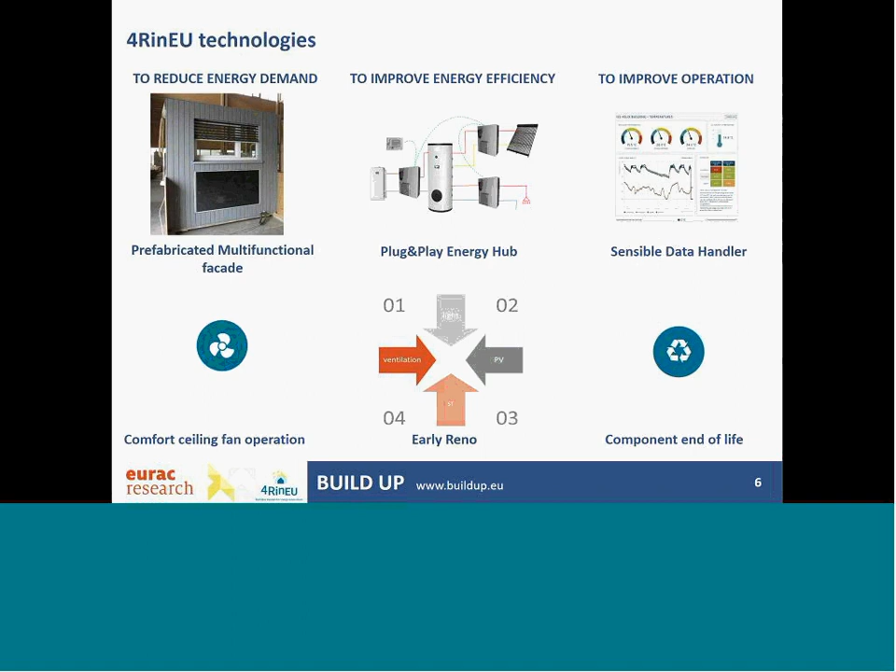In this case, we are developing a tool to optimize the use of renewable sources, in particular PV plus battery, but also solar collectors, natural ventilation, and daylighting. So the tool to optimize the use of the envelope includes different kinds of strategies and technologies to exploit the local renewable sources. And then a specific study on the end of the renovation cycle for the technologies in order to increase the reuse and the recycling of the materials we are using.

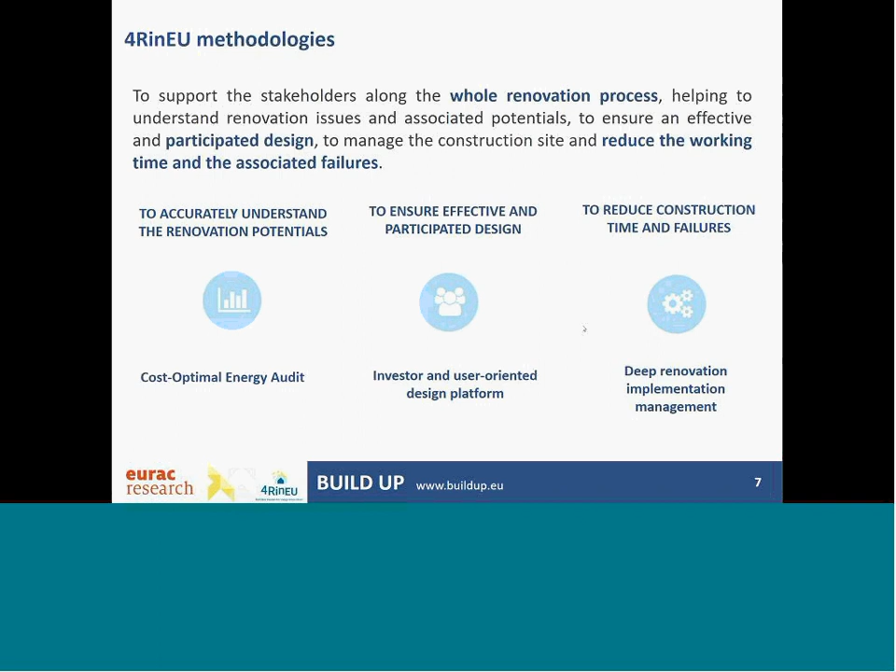And then about the methodologies, starting from the audit at the beginning of the process, just to decide and to drive the design process. Here the idea is to try to optimize the investment in effort and cost and the information we can get from the audit. To facilitate the design process and to involve the different players in a participative design approach, and also the best managing of the construction site as the third methodology. And as I said before, all these feed into a cost-effective rating system that is a way to manage all the information and to actually implement the deep renovation.

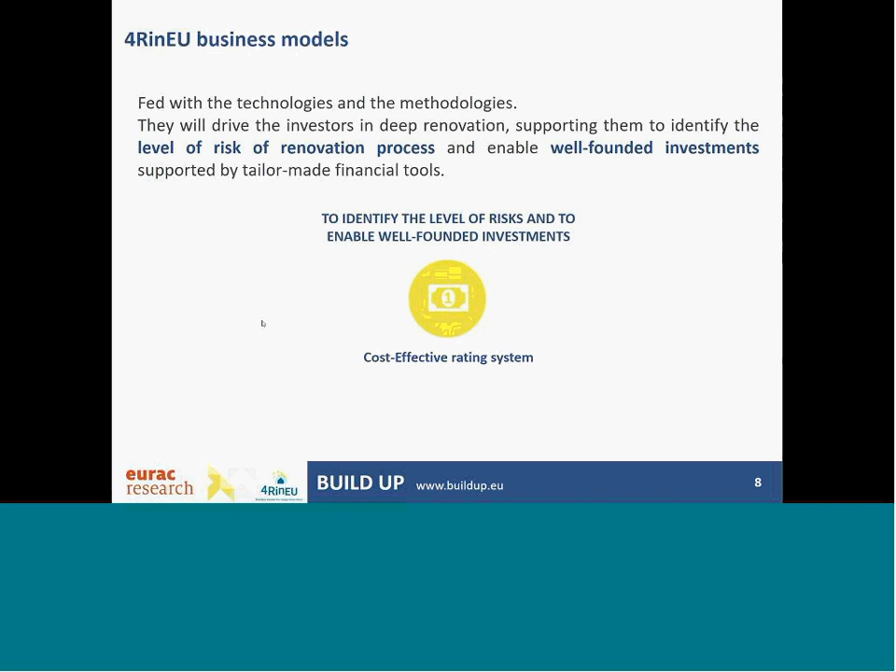So concerning the technology development, the lesson learned from the first application is the need of close collaboration among players, so owners, advisors, contractors, researchers, to improve technology solutions and have actually a systemic package of deep renovation. The participative approach is very, very important. That again is something we foresaw in the proposal, and it was demonstrated that it is very important.

It's important to quantify the evaluation of the performances with a functional mock-up to be tested in the laboratory, as well as with a numerical model and parametric simulations. And then the improvement and implementation phase is to be driven by performances. So it is important that the different players always look at the performances of the solution.

So for the case we already implemented, there was an initial concept of the deep renovation, some prototypical action just to perform a pre-analysis of the renovation packages and of the specific renovation package of the specific building renovated, and then the detailed technical specification for starting the procurement procedure. So a very detailed bill of materials to be used in the tender procedure.

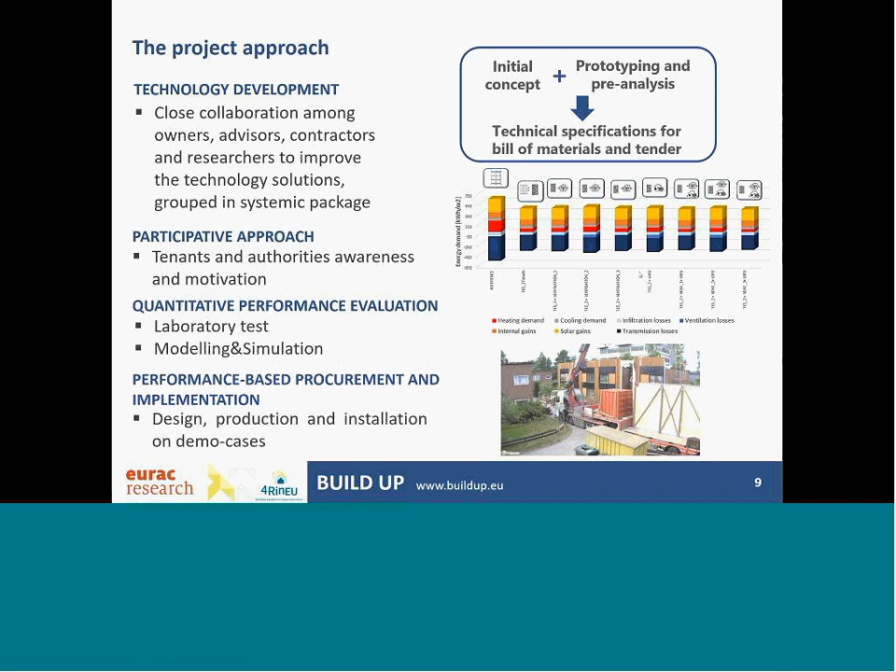Yeah, this is more an overview of the project. I would give the floor to Roberta to go a bit more in detail with the preparation of the methodology to develop the deep renovation package. If you have any questions, please keep them for the end of the webinar, and we can hopefully have a fuller discussion.

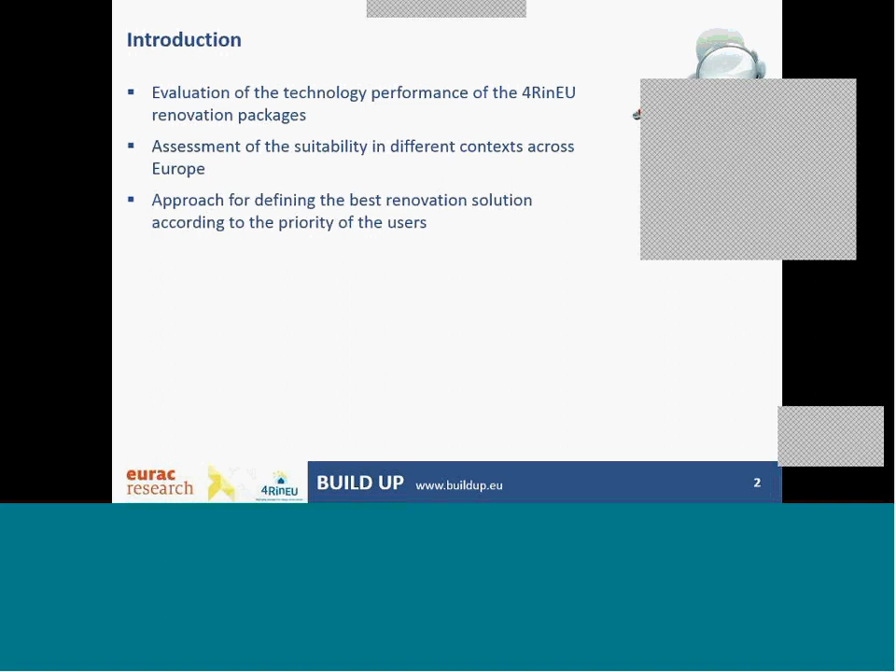Within this presentation, I will show you the methodology and approach that we are adopting for defining and evaluating the performances of 4 new renovation packages across Europe. So, this presentation deals with the evaluation of the technology performance of the 4RinEU renovation packages. We will assess the suitability of these renovation packages across Europe, and I will give you some insight into the preliminary results of the simulations that we are performing for evaluating the performances of the packages across Europe, and the approach that Roberto mentioned in the previous presentation to define the cost-optimal renovation intervention according to the priority of the users.

So the starting point for us for defining the deep renovation packages is the definition of homogeneous areas within Europe. We know that there are also other research projects that dealt in the past with this topic, and they basically adopted the geocluster approach that we decided to adopt too. I can mention the FP7 project iNSPiRe and the Horizon 2020 project MORE-CONNECT. So we decided to change the approach a little in comparison to these projects, since we'd like to keep the national boundaries in order to ensure that the applicability of the renovation package is full, considering the minimum requirements provided by each national law.

So the three criteria for defining the mentioned geoclusters are to keep the national boundaries, and so according to the minimum requirements provided by the law in several countries, we define a more or less homogeneous area. The features of the building stock, so each geocluster has a similar share of multifamily and single-family houses. And climate conditions. This is also a very important point for the definition of the packages. So this is basically to define some homogeneous areas in which we define and evaluate the performances of the renovation packages. So we have these 6 geoclusters.

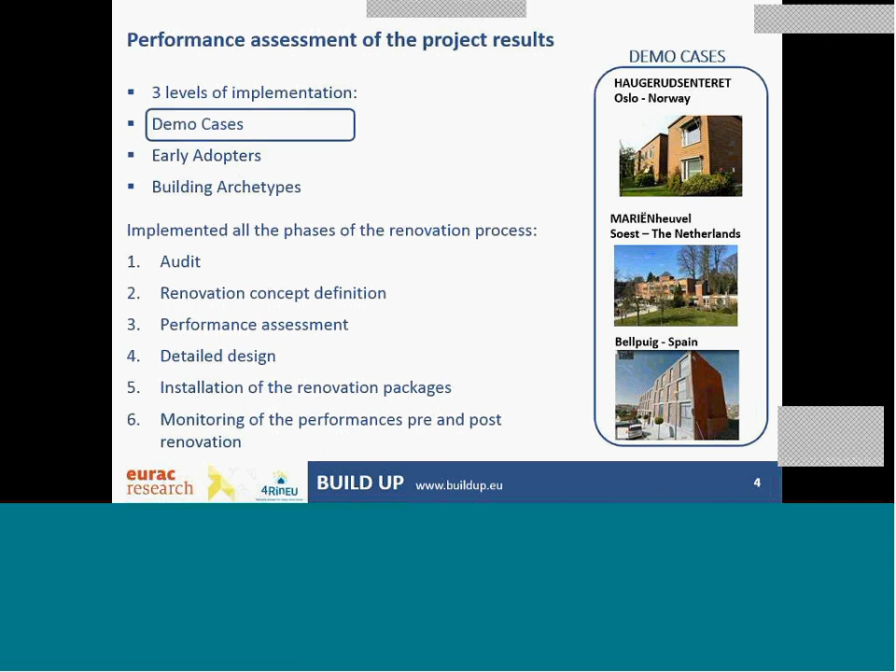So basically we start from the audit to the definition of the renovation concept. We will make a performance assessment to fine-tune and to define a detailed design. Then we will proceed with the installation of the package, and we will monitor the performance. So a full implementation of the 4RinEU concept. Then we'll have these early adopter teams.

The early adopters will follow 3 feasibility studies in 3 different countries across Europe, in which we will try to implement theoretically the approach provided by the project 4RinEU. So we will start with an audit procedure. We will define the renovation concept. We will find the performances of the packages proposed, and then we will proceed with a detailed design. In this way, we can test if really the packages that we find could be also applied in different contexts.

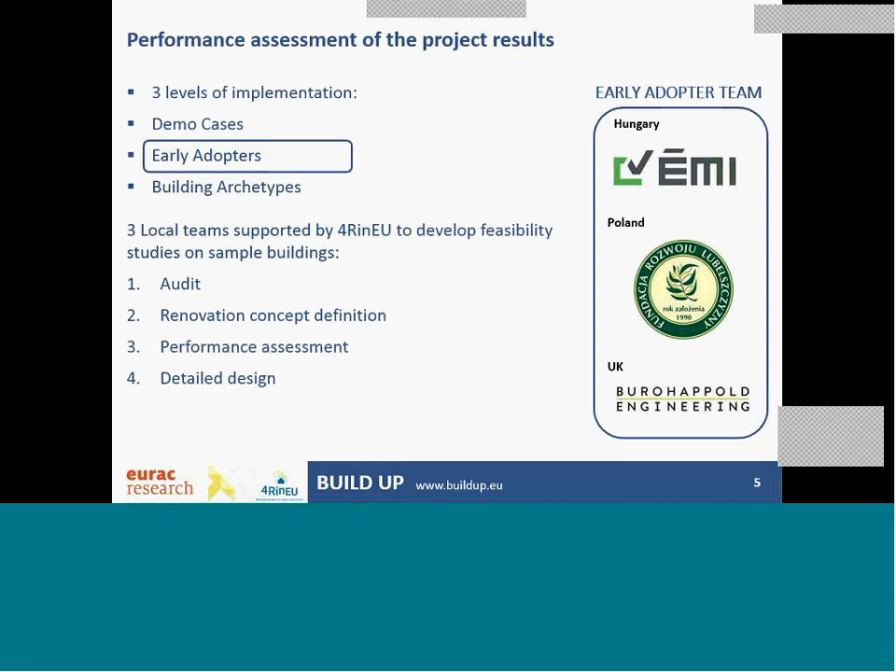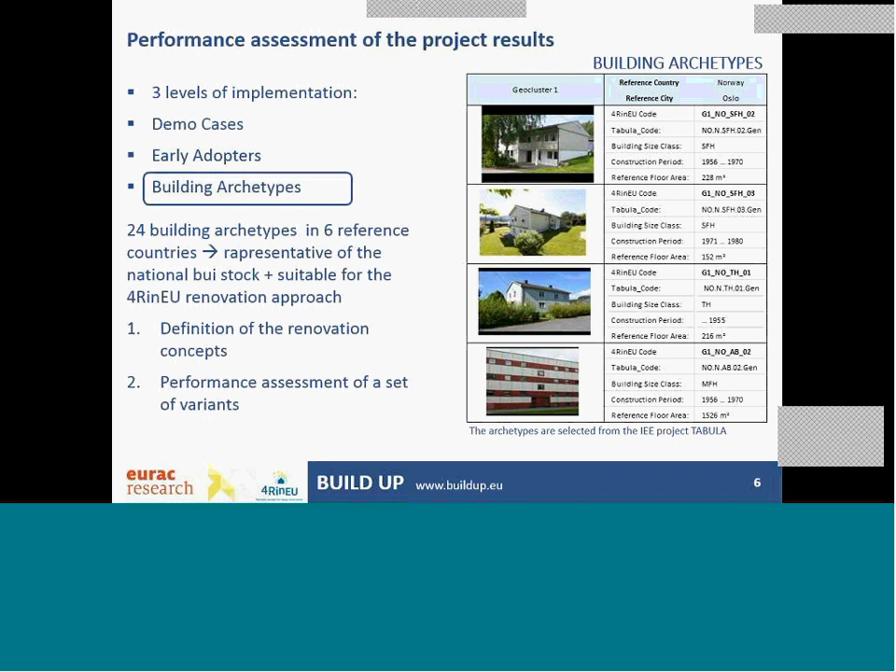And so, with the 3 demo cases and with the 3 early adopters, we can cover a reference country or geocluster in Europe. Then we have a third level of implementation that are the building archetypes, in which we will perform a real theoretical implementation of the packages by defining, according to the context and according to features of the selected archetypes, the best renovation package.

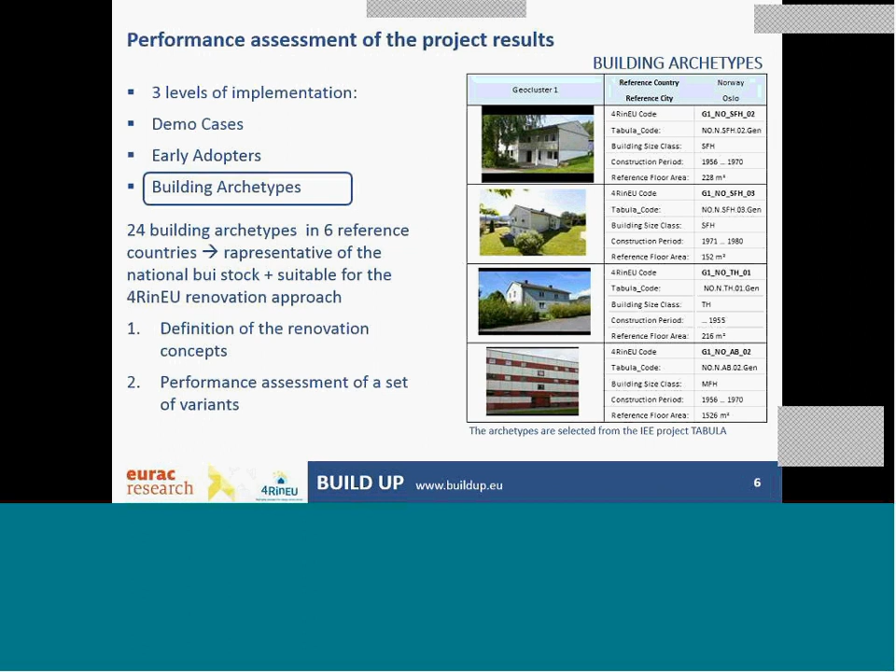It's important to point out that these archetypes come from the Intelligent Energy project Tabula, and so we selected from the Tabula database the most suitable buildings according to the building features and the possibility to apply the renovation packages as defined within 4RinEU. So basically we will define the concept and we will make a performance assessment of a set of variants in order to understand which is the best configuration according to the criteria we'll explain soon for the geocluster that we are analyzing.

As criteria of evaluation of the renovation packages, we defined a set of key performance indicators. These indicators deal with 5 thematic areas that are energy, environment, comfort and indoor air quality, economic issues, and building site management. Some thematic areas deal with the specific request of the European Commission within the work program. So we need to respect a target of energy saving, a target of cost reduction of the renovation, and a target of the reduction of the duration of the construction site.

But we decided to assess also other factors like the comfort, the production of renewable energies, the impact on the environment, and also the net present value of the renovation. That is also important to define the business model of the renovation packages. So, starting from all the issues that I just described, now I'm going to present the preliminary implementation that we are doing at the moment.

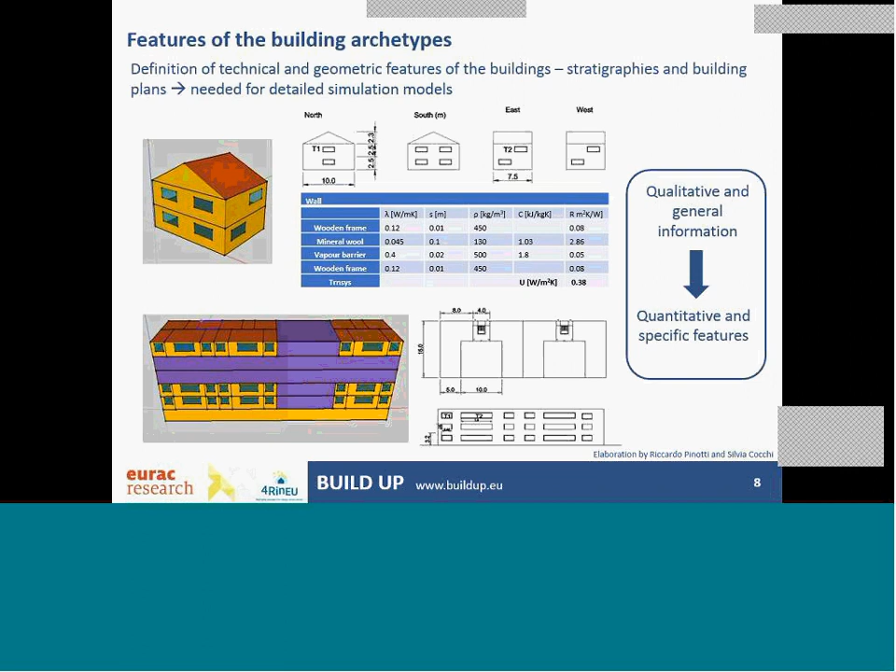So the first step is to translate the information included in Tabula, that is effective but qualitative and general, and not really suitable for defining a detailed transient model, into quantitative and specific features. Therefore, we prepared detailed plans and we defined the materials and the thermal properties of each layer of the envelope. We defined more in detail all the features of the heating and HVAC systems. And we basically describe deeply all these buildings in order to be able to perform the simulation. So here we have 2 examples of a single family house and a multi-family house that we analyzed.

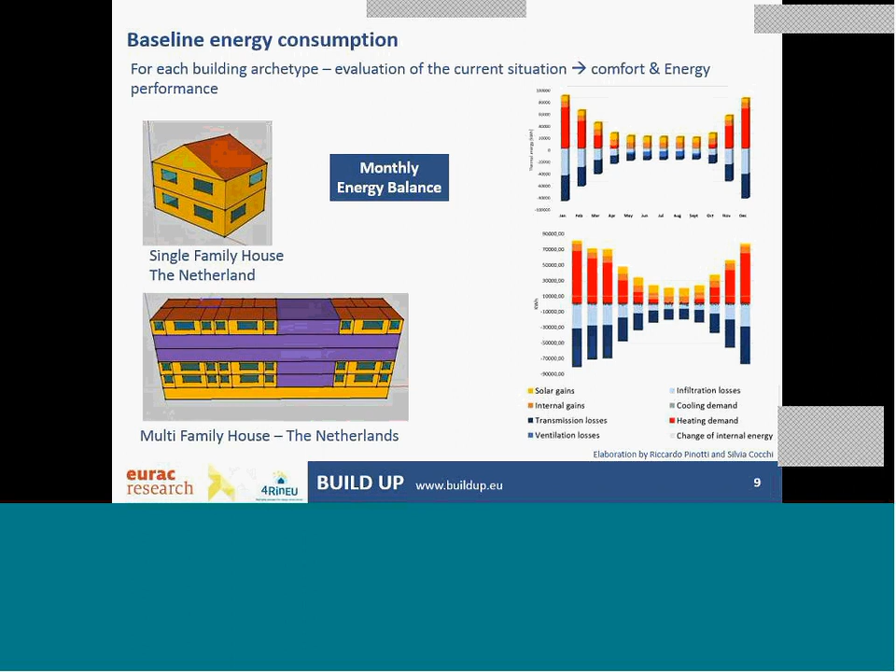We defined the baseline for each of the 24 building archetypes that we adopt for the simulation, for the analysis purpose. And so basically here I show you just the monthly energy balance, but you have to think that for each building archetype we evaluated all the key performance indicators, so that we have a comprehensive overview of the current state of the buildings, and we can really evaluate the impact of the renovation packages on the building itself. Therefore, applying the renovation package is to define the renovation concept.

So we have all the technologies defined within 4RinEU, that are the prefabricated facade, the mechanical and natural ventilation integrated in the facade as well, the ceiling fans, the plug-and-play energy hub, again the photovoltaic system and solar thermal system as optimized by EURAC. So we have all these ingredients, and we have to combine these ingredients to define a couple of renovation concepts.

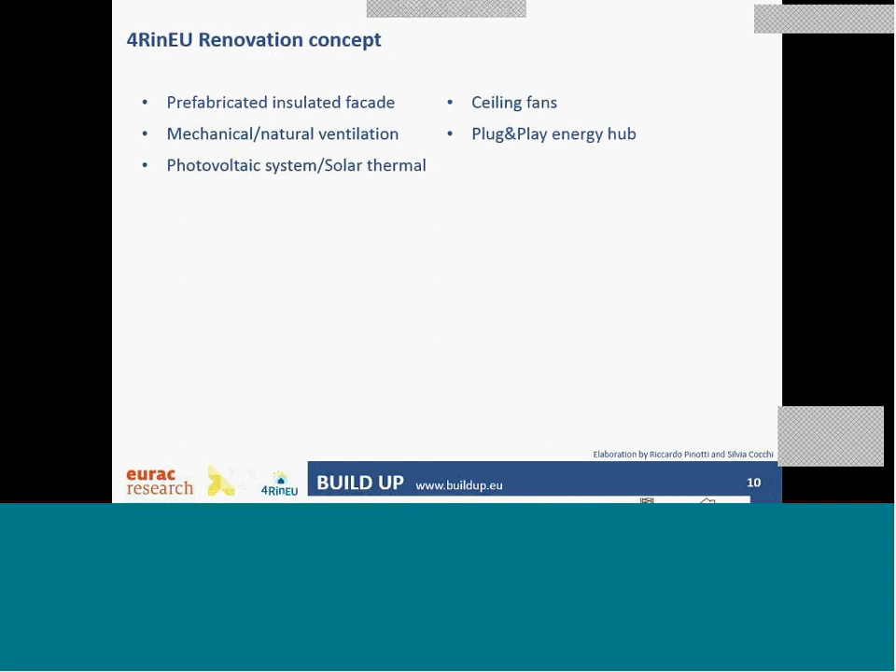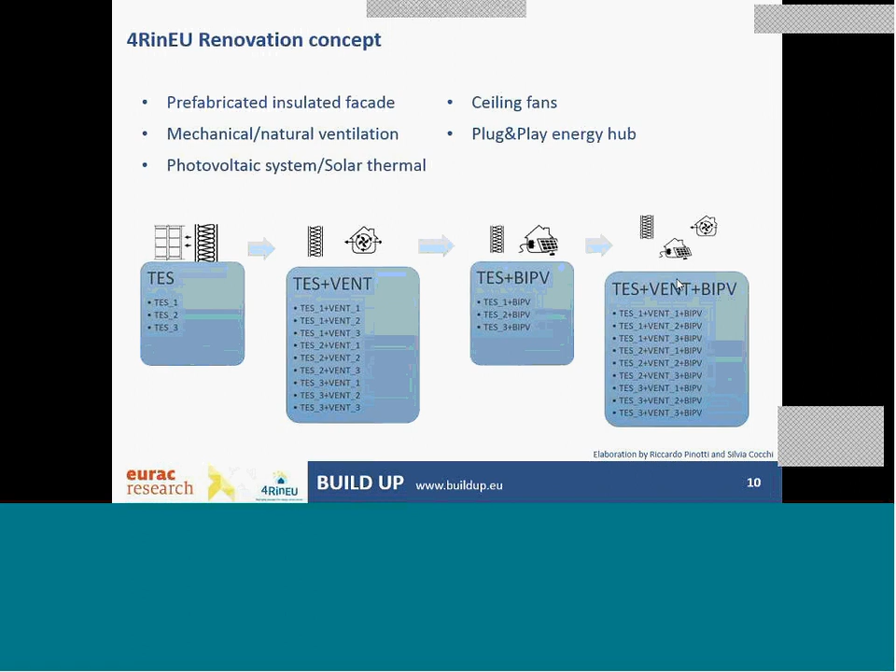Here just an example to explain to you that in some cases we have a simple insulation of the prefabricated facade, then we can integrate the ventilation with or without heat recovery, integrate the BIPV, and we can have an integrated solution with the BIPV and ventilation in the facade. This is just an example. For sure, the packages will include also other technologies defined within 4RinEU according to the need of the specific building and to the context.

Just to make you aware of the work that we are doing, this is an example for the single family house in the Netherlands. For each package we define a set of possible variants, according to the different decisions that we can take. For example, the thickness or the properties of the insulation, or the ventilation rate, the efficiency of the heat recovery.

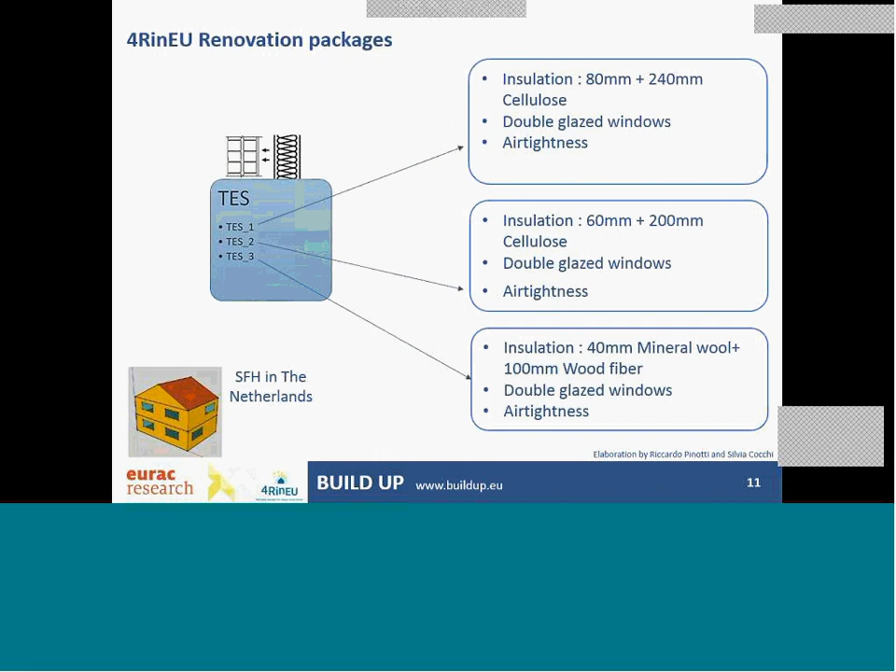So we create a large number of possible variants for each renovation package, and for each building we perform like 128 parametric simulations of the several variants as defined. So these variants will allow us to identify which could be the best solution for that specific context.

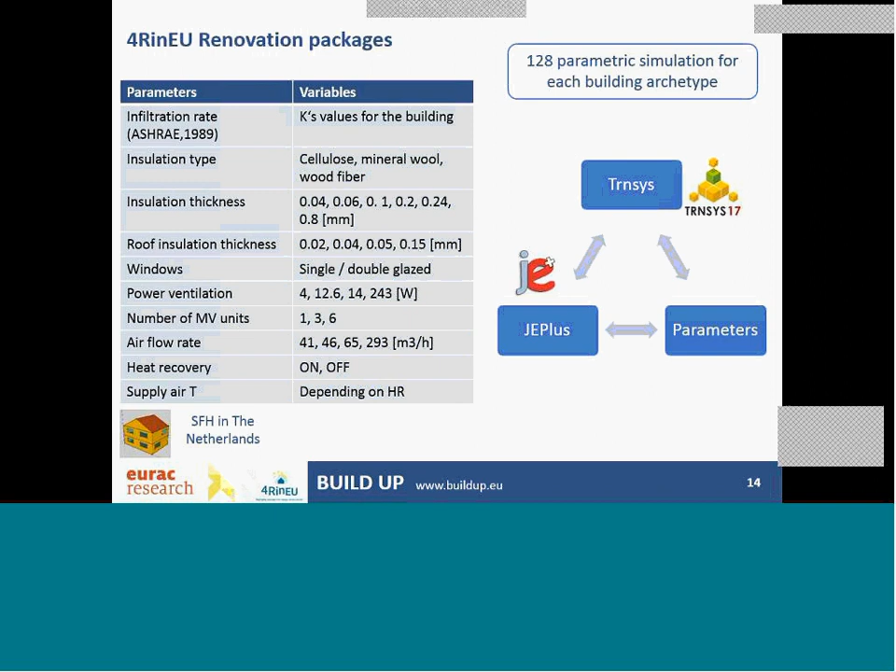So you have to think that for a geocluster we have some concepts that are in common, and then we evaluate these variants in order to define very in detail which could be the best renovation package according to the key performance indicators that I showed you. And to do that, we set up a parametric simulation by using TRNSYS and JEPlus, and we compare the results in terms of key performance indicators.

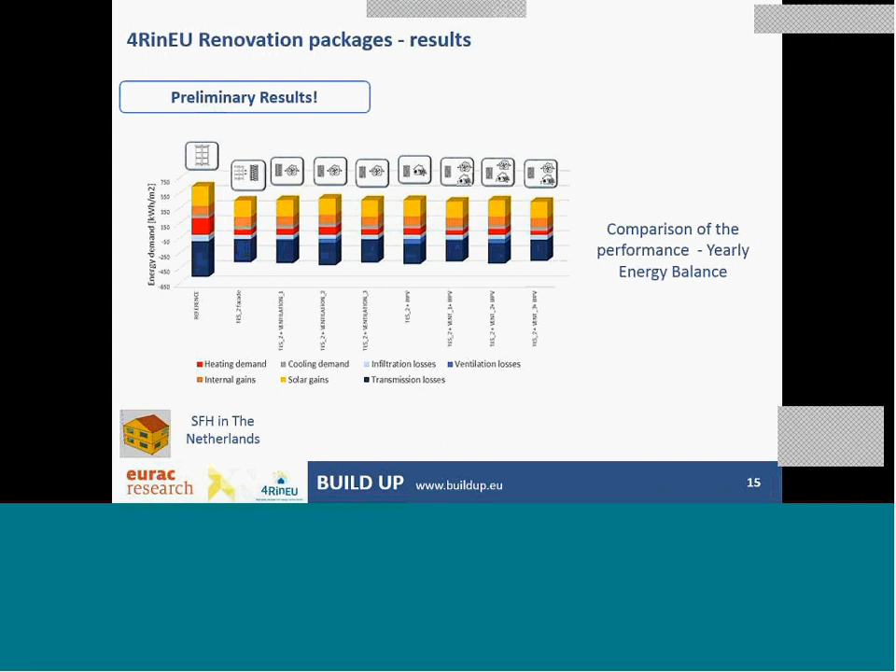For building archetypes, we will try also to create the performances in terms of building site management, so the duration of the construction site, but this is quite a theoretical analysis and maybe is not as relevant as the other performances that we can really evaluate quite in detail with the performance simulation.

To conclude the presentation, I would like to point out that all the results that we evaluated for the early adopters, for the demo cases, and for the building archetypes will be stored in the so-called repository of renovation packages that is defined by the project 4RinEU. So, the repository will allow the user to have access to a very large number of simulations and performance evaluations of different technologies and different packages.

And the repository will be also the background, so the basis with which we are going to develop the cost-effective rating tool, and will be the core of the business model for defining the renovation package according to the priority defined by the user. So, for example, if a user would like to maximize the improvement of the comfort and indoor air quality in his building, we will be able to grab from the repository the solution that in his specific context and with that specific building best suits their needs.

So, with this tool, it is possible to support the user in the decision-making process to start a new renovation process in his building.

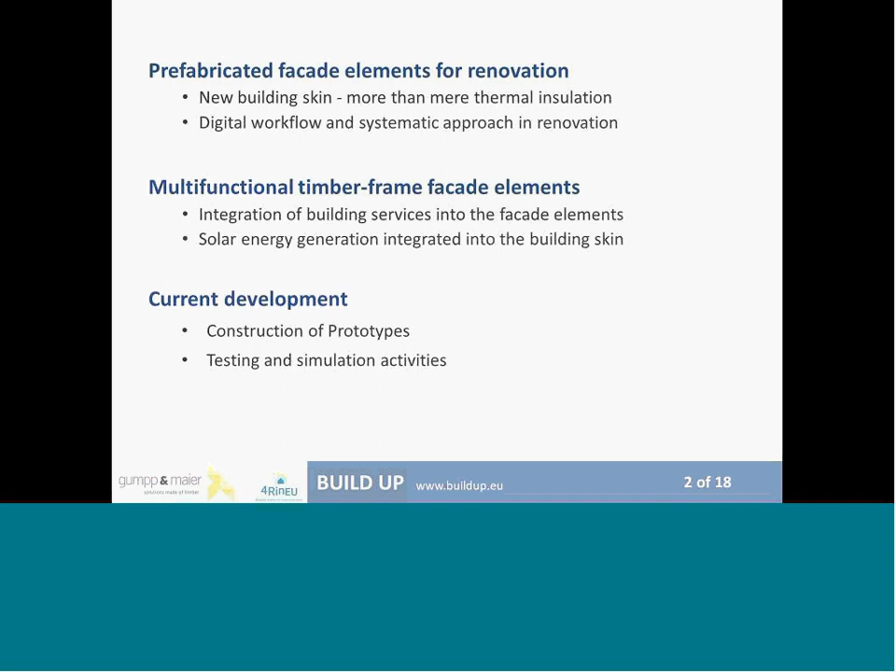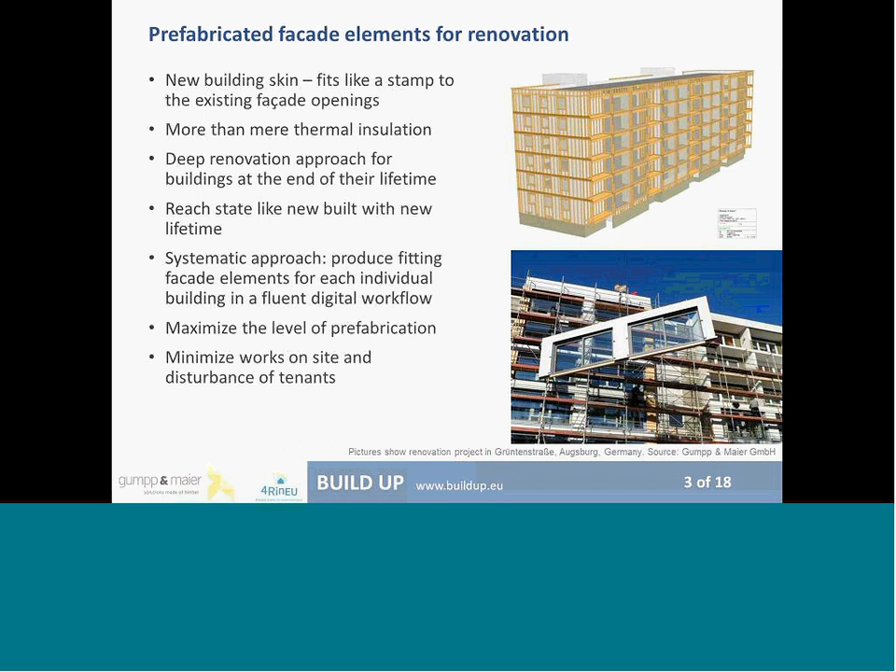So the question sometimes arises: should we renovate a building, or should we just demolish and build a new building? It's a very big decision in the beginning of a renovation project. Demolition, for example, adds a lot of costs. It's time, effort, and a lot of disturbance for the tenants and for all people around the building.

I would like to point out the ecological point of view: when destroying a building which is still able to carry loads for the purpose it was built for, you have to demolish and transport everything, which produces emissions, and then build a new building, which altogether in a rough estimation would be 450 kilograms CO2 equivalent per square meter. The energy is preserved when you renovate by using the structure you already have.

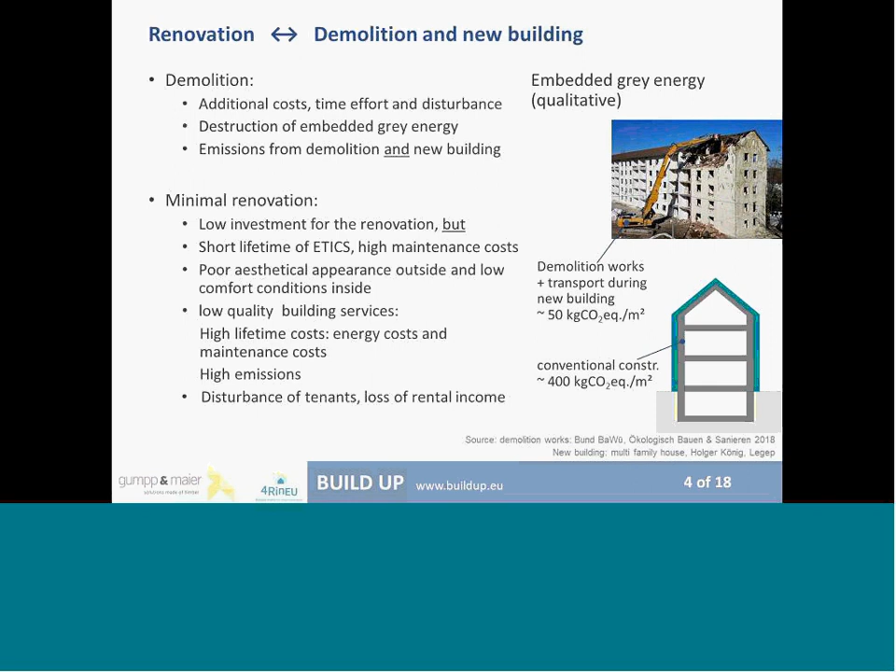Other aspects are always the building services. If you do a minimal renovation, you will keep the buildings as they are, and this will produce high lifetime costs, which are there already, and you don't change anything about it. Or there are high emissions from the running systems in the building, and if you want to change the building services and do this in a conventional way, you will have a lot of disturbance inside the building. And this means that you have to either move tenants or at least lose rental income.

We provide a sustainable solution with the timber frame facade elements. We approach a deep renovation, which means that we apply robust and reliable solutions, as you heard already today, aim at low maintenance costs, solving the structural, architectural, and building physical issues of the building. So we change the services and we produce a very aesthetic new building, sometimes even with more space than you had before.

We try to be off-site as much as possible, have a short and little disturbance of the tenant, and increase the comfort conditions inside the building. This is due to the fact that we use natural material, timber elements filled with cellulose fiber. This is much more sustainable and provides a living quality, rather than bringing materials outside of the building.

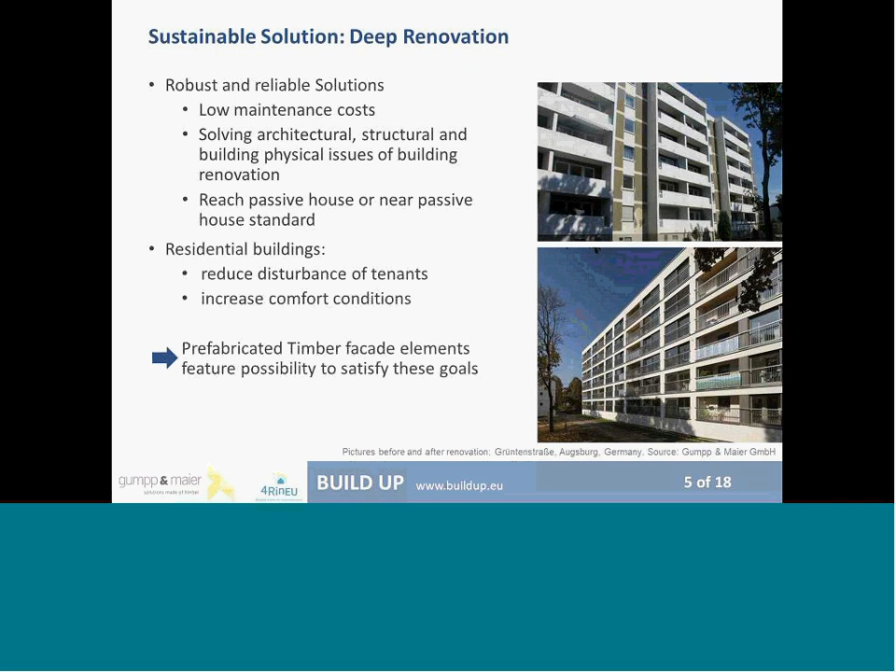To introduce you to the digital workflow and the systematic approach. The thing about the workflow is that you have an individual building with individual openings and facade, and you will have to produce a new facade which really fits this building. So the beginning of everything is a digital measurement of the building, producing directly in a fluent workflow a 3D model, which is adapted to the digital measurement.

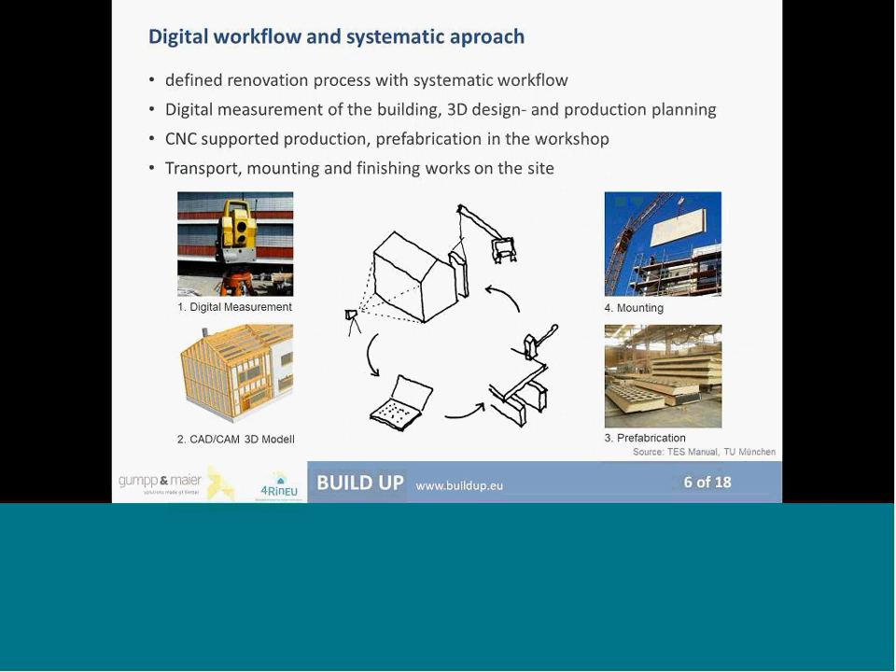So there will be the production planning, and in the workshop, the prefabrication at a very high level, and afterwards the mounting at the building. And if I've done everything correctly, the elements really fit to the building in a way that you can mount them very quickly at high effectivity.

Prefabrication is solving the joints, which means it's designing and developing all details of the construction. So it's turning around the conventional construction process where you go to the construction site and start to have very small elements which you have to adjust to the building. It's really thinking things through before you go to the building site. So it's a bit of effort and time which you have to invest in the planning process, but it will pay off when you go to construction and see that everything works very quickly and smoothly.

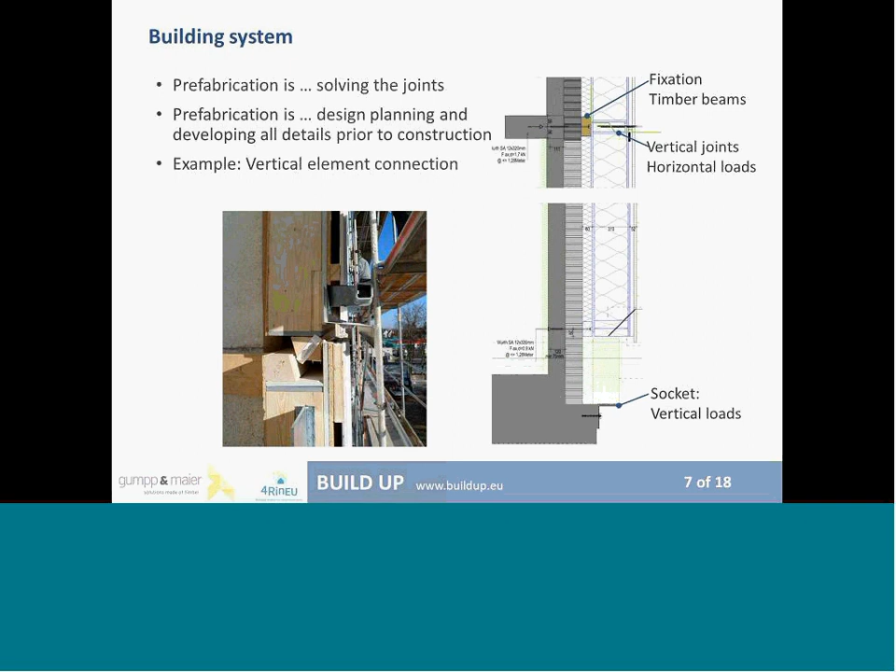So for transport and mounting, you can see some pictures. An element typically is one story in height and up to 12 meters in length. There are also other versions which are possible. The positive thing is that timber is a very light element which you can easily shift and lift, and put in place at the building. So the crane has to be able to carry the load at its very top. About the mounting, the scaffold always has to have some distance to the building, so you will be able to put the elements in between the scaffold and the building.

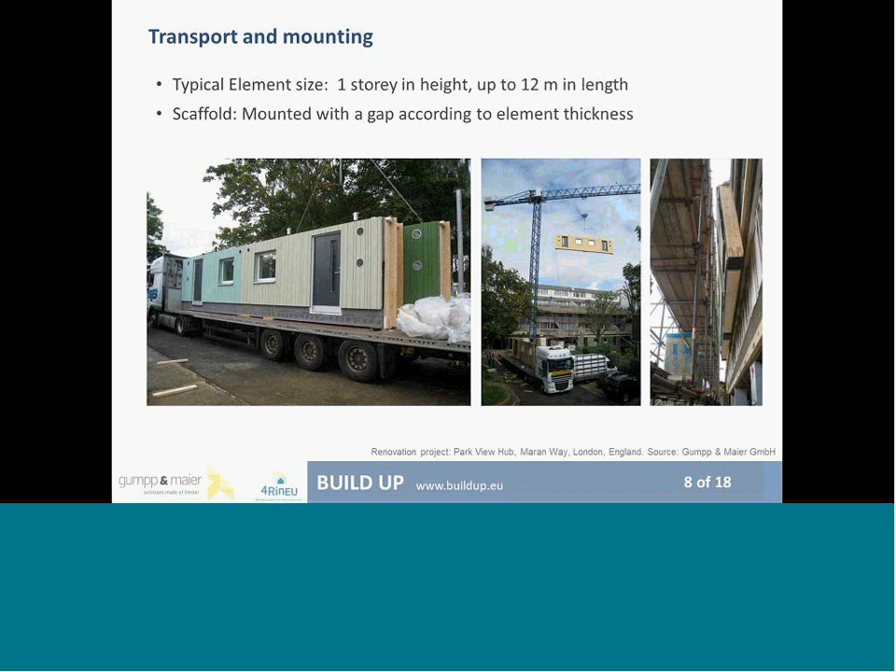Here is the approach to build multifunctional elements. So as I said already, it's possible to have additional stories, to have additional area, but the multifunctional thing also is that we're carrying an element where you can integrate different functions of the building.

So by making insulation and airtight layers around your building, one option is to just open the windows. Other options are to have decentralized ventilation devices, which will also do heat recovery, which is important if you want to reach passive house standard.

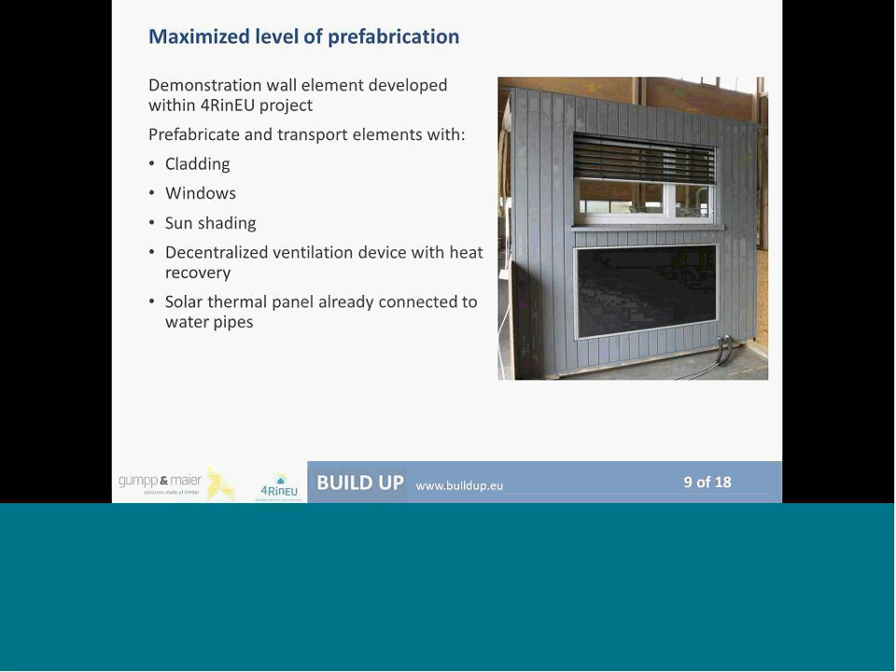So in the facade elements we have new windows, and shortly before the new facade elements come, the window will be removed and a new window will be placed in front. You can think about another option. You, for example, leave the existing window, put the new window and remove the old window from the inside.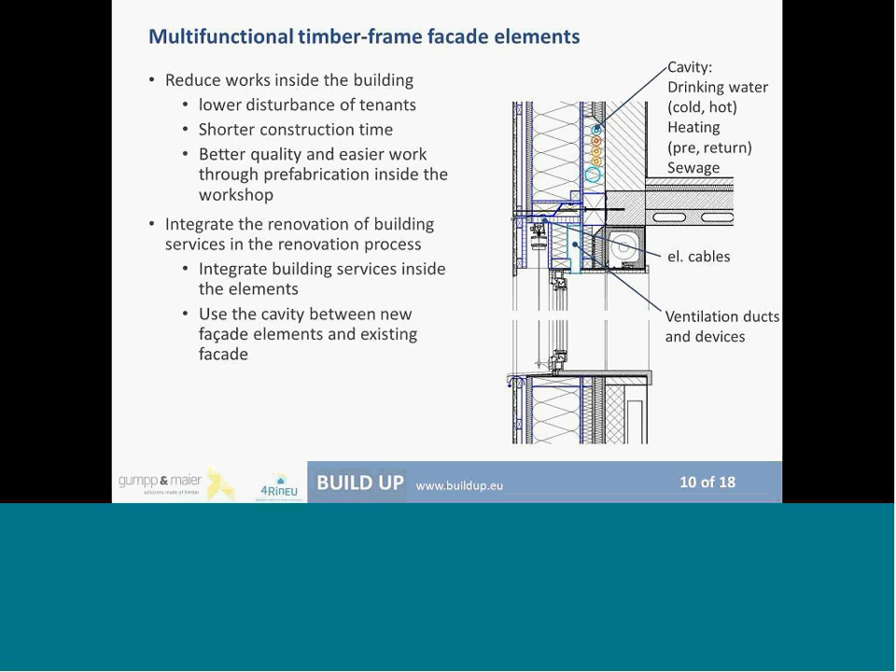So it's a very automated thing where you can make changes, and all the steps will already be made before the construction starts. Then, when you do the construction site, it will be a very quick thing, and making, for example, the new window sills from inside is very short, which doesn't disturb the tenants very much.

Here you see one example of an earlier research project where we integrated a larger amount of ventilation devices in the elements, and this makes a decentralized system for one story. So we distribute all ventilation ducts on the outside of the building, and also in the element there is a mechanical ventilation and heat recovery device. So not centralized for the whole building, but centralized per story.

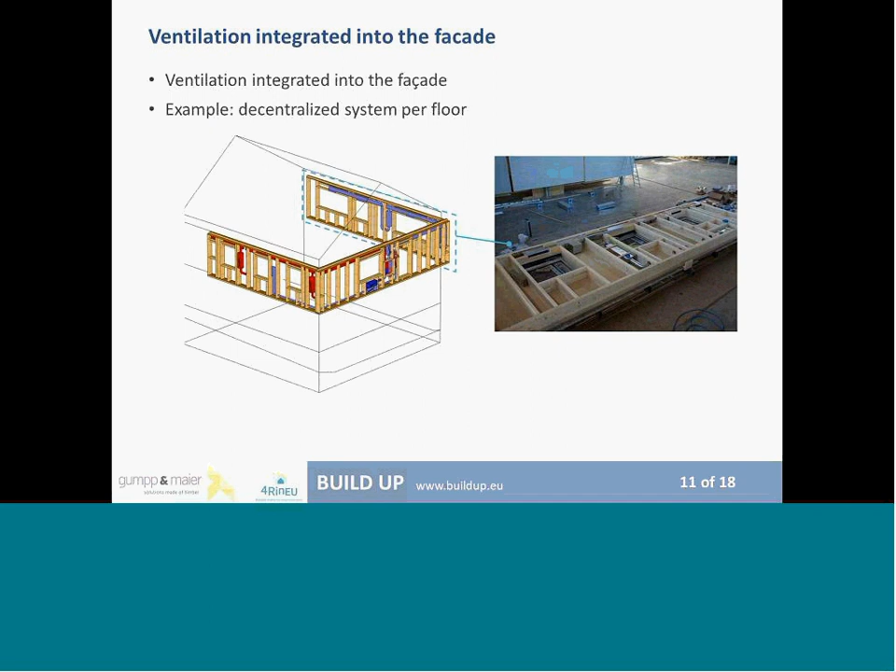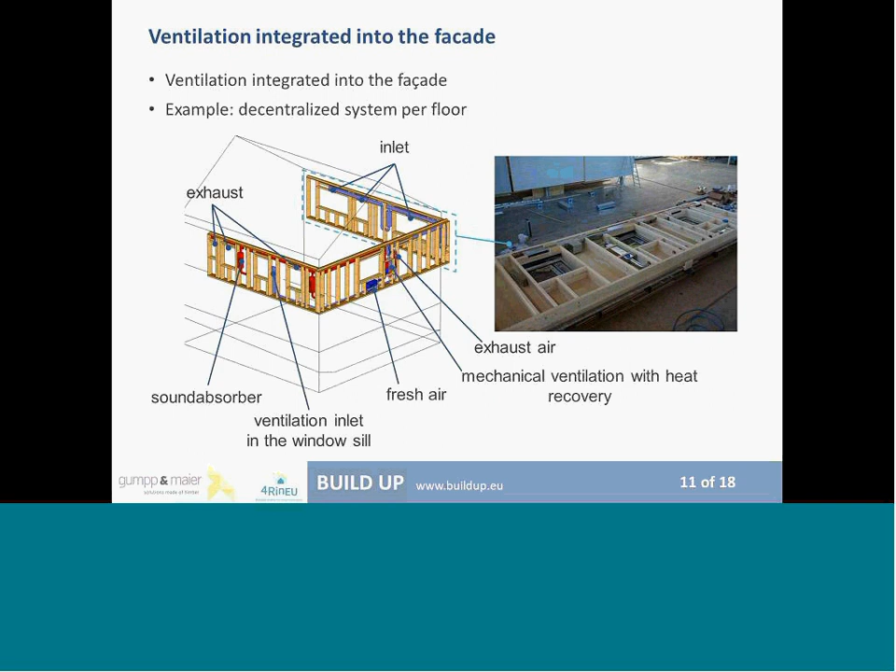And you can also see how it looks in the workshop. So it's very easy to install all those ducts inside the workshop, and you have a very good surrounding. It's not like standing on the ladder or the scaffold and having to do everything on site. Or even if you go inside the building, you will disturb the tenants, and it's very difficult to work in this surrounding. So you can see the different parts of the ventilation system. This is also part of our developments.

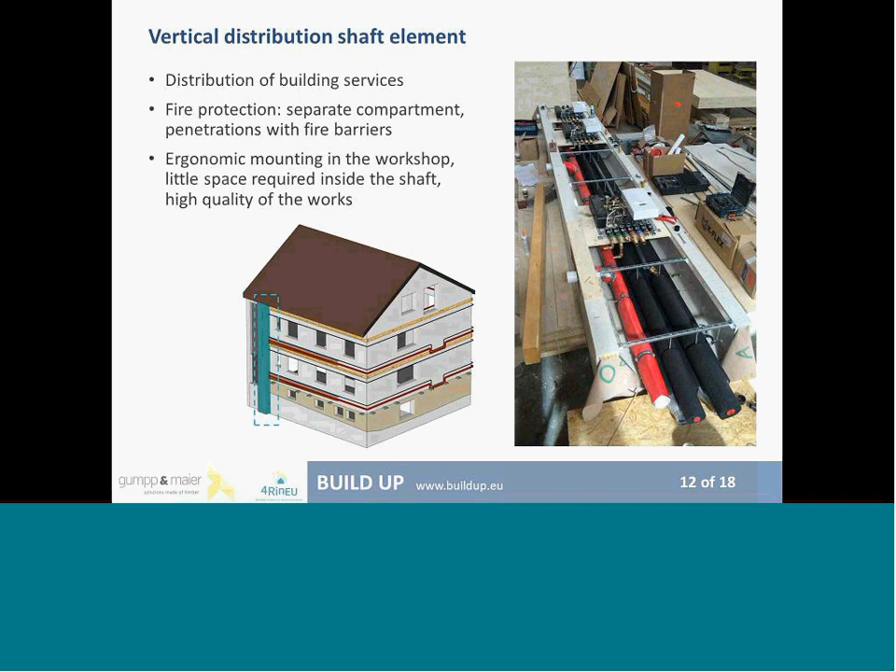We can distribute the building services in a vertical shaft element, which is located in front of the building. In one step, you have this industrialized building component, which is very quick to mount in front of the building and connects the cellar with each story. Here you can see in a more practical way what I explained to you before, how it's like on the construction site.

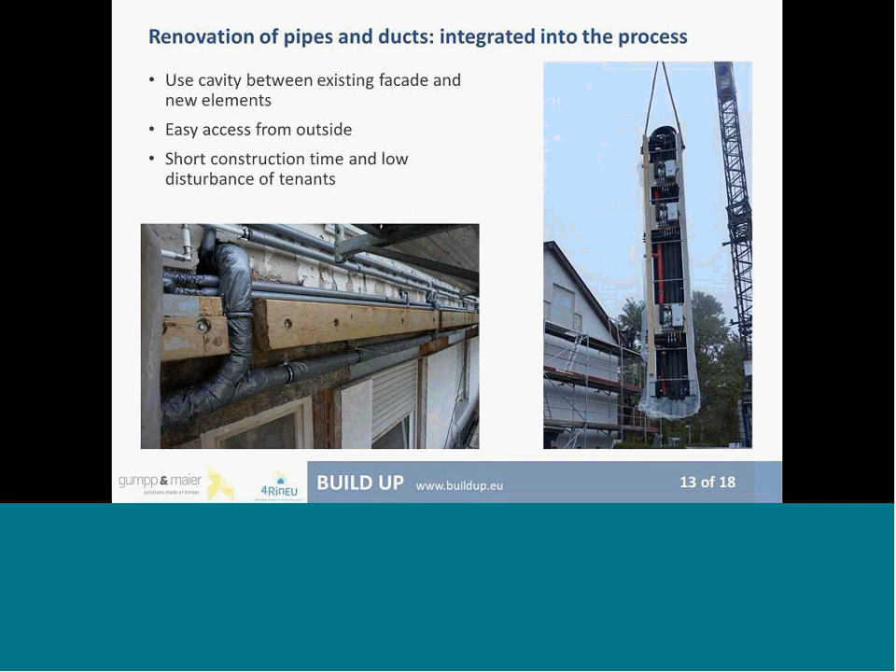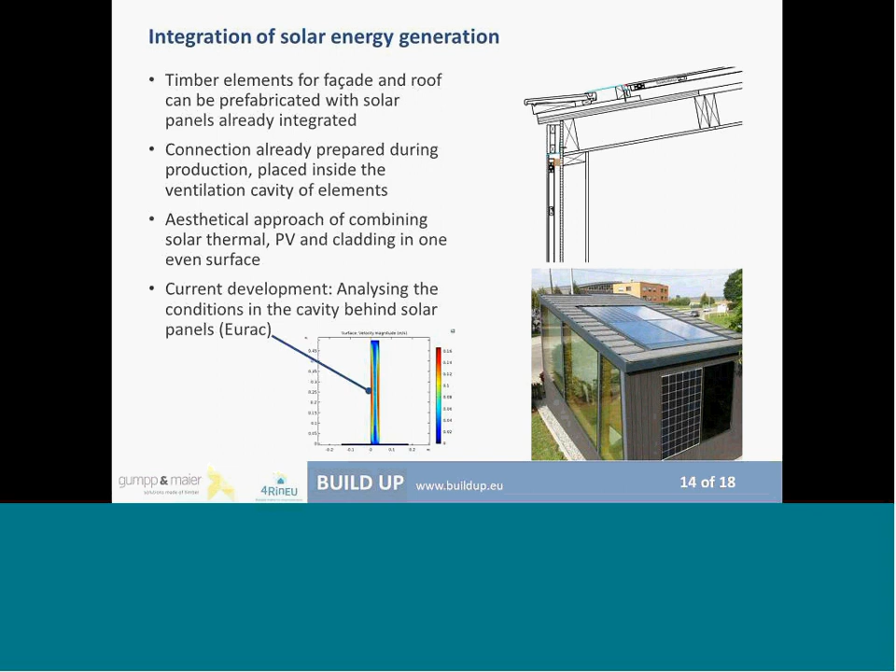To make the investigations, we have at Eurac in Bolzano the possibility to simulate the indoor and the outdoor climate with the blue chambers, which you can see there, which will be put near to the prototype. This prototype, as you can see in the section, is put in front of a masonry wall, and the green part is the new prototype with the integrated heat recovery ventilation device.

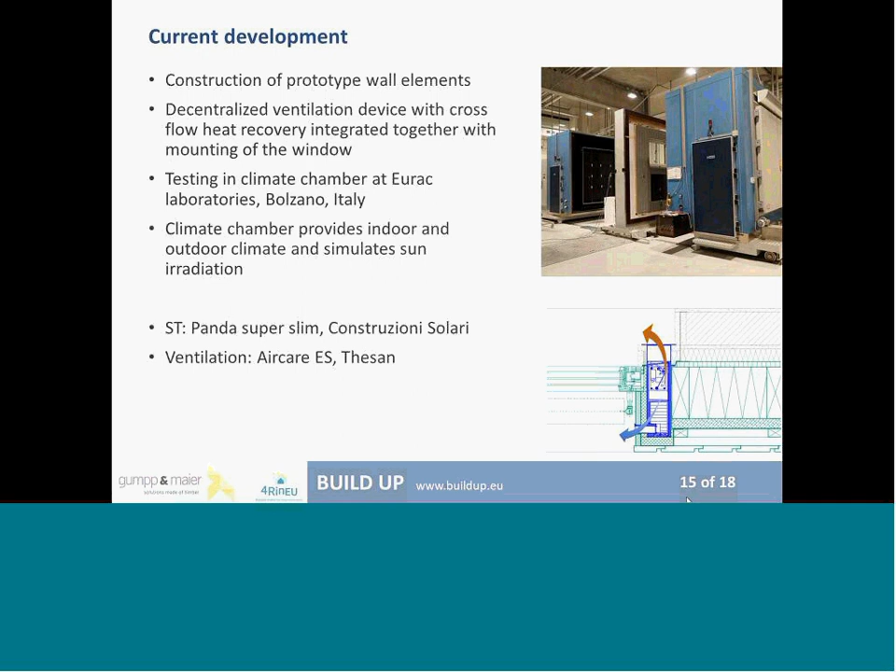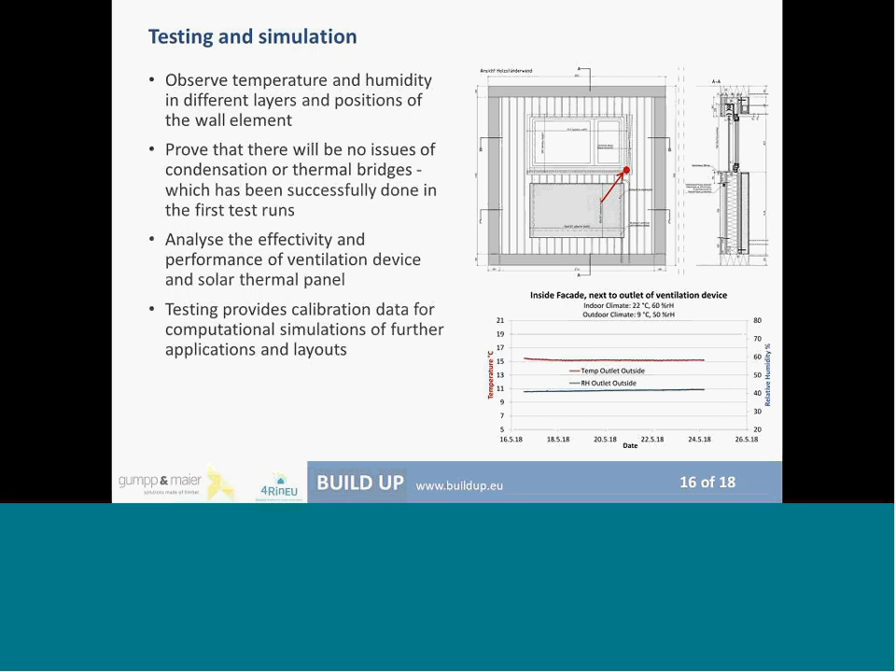Yeah, there are other tests coming to change those conditions and to get more results for different surrounding conditions. So this brings me to the conclusion of my presentation.

The technique of renovating with prefabricated timber facade elements is mature and has already been applied for years, and we have replicas; it is a very well-developed and sophisticated technology. For 4RinEU, we have three projects, as you heard already, which will integrate the building services.

So this is something which is innovative and still needs some more applications, but we are on the way to reach the possibility of reproducing it. But as you already see, it's a very complicated planning task, and the key to success is working in an integrative planning team, together with the manufacturers and the planner for building services. All the parts of this facade renovation cannot be separated; in the planning they have to be considered all together.

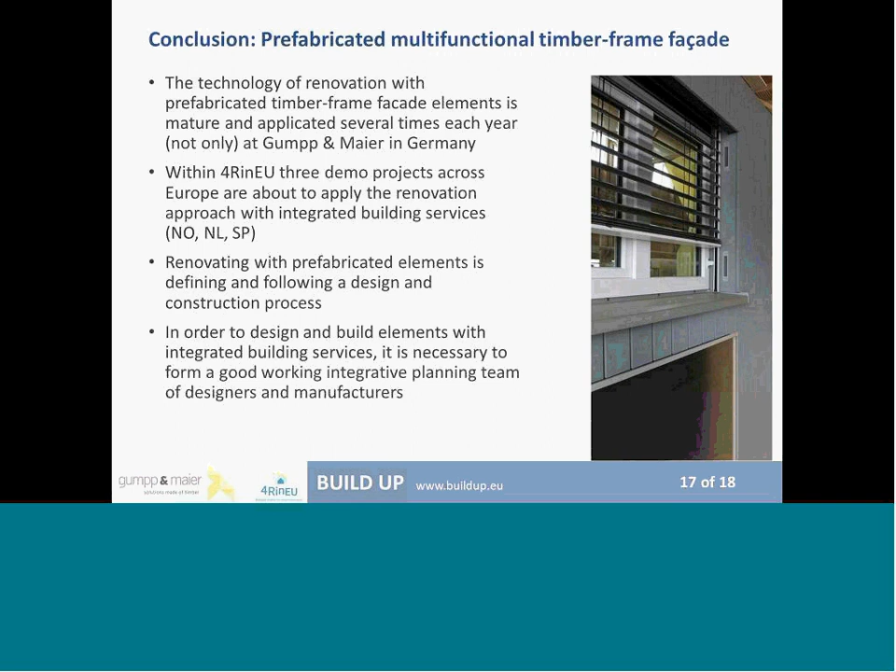And now to give the word to Vera Lukina, who applied this technology in Norway, and we'll see in more detail how the application looks. Thank you very much, Maximilian, for the very interesting presentation, a practical explanation of what we are trying to do in 4RinEU. Maximilian also supported the design team in Norway. Vera is going to present what happened there. Please, the floor is yours.

Thank you very much. My name is Vera Lukina, and as Maximilian said, I was leading the demo project for 4RinEU in the municipality of Oslo in Norway. Just shortly about us: Boligbygg is a corporation in Oslo municipality. We own and maintain all the social housing in Oslo, which makes us the largest rental housing corporation in Norway. There are 25,000 people living in our houses and apartments, and we own about 11,000 rental units.

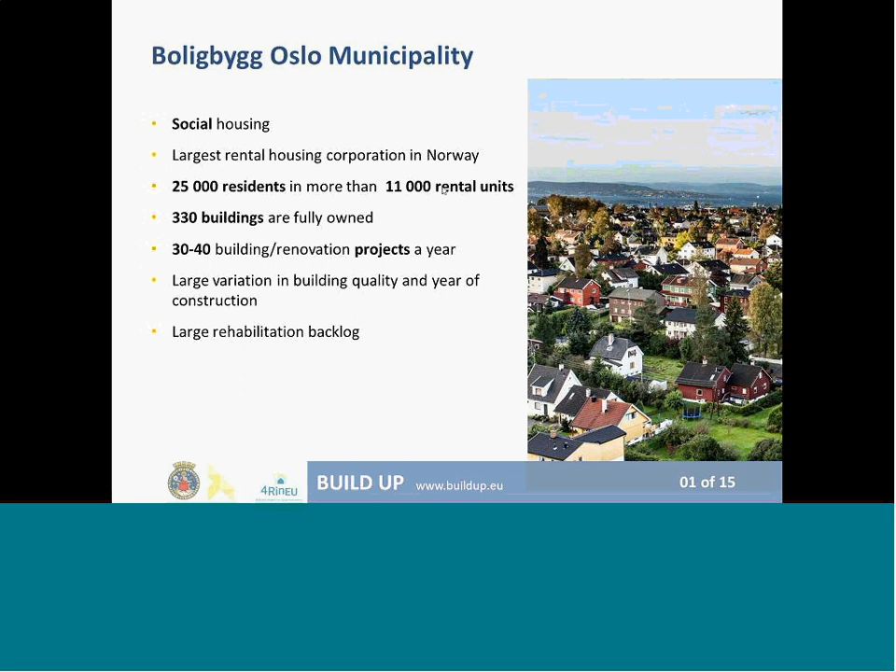There are 330 to 350 whole buildings that we own, and they are the main focus of our building projects, which are about 30 to 40 a year. Quite a lot. We also have a large rehabilitation backlog that we are working with. The age of the buildings is quite variable. So it is very interesting for us because we have many buildings and we really are looking for new solutions for them. So 4RinEU has been our first European project.

We have different kinds of motivations to participate in it. We have been very curious, very interested to support innovation and development. We wanted to try new experiences and collaborate on an international level. And as I mentioned, we wanted to try new technologies that could help us renovate our buildings in a better way. With ambitious targets in Oslo municipality for ecology and energy use, and at the same time a backlog that makes us careful where we use our budget, all the new technologies that can make rehabilitation more practical and more ecological and energy efficient are really exciting.

And at the same time, with so many tenants living in our apartments, it's a really difficult task for us to be moving them all the time. So we are looking for new solutions that won't require that to the same level. We chose a building for participating in 4RinEU around 2015. We tried to choose a building that would be suitable for this kind of project: not too large, quite simple geometry.

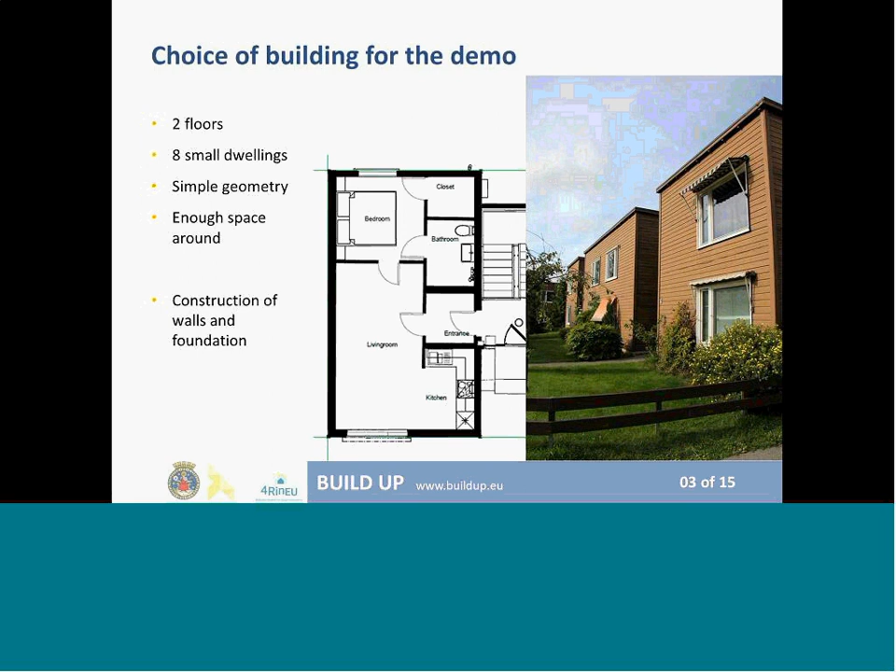Things worked quite well. There were a few things that we didn't discover before we began designing the project. We assumed a normal construction, which in Norway is normally timber frame facade all the way, but here we discovered porous concrete on the first floor. We also discovered that we didn't have much of a foundation underneath the walls. So instead of mounting the facade elements on the existing walls, we had to build a new foundation around the building and put the elements on it. It became a somewhat different type of project than we planned, but it worked well this way too.

Another point was, since we had to find our own provider, we really wanted to bring the technology to Norway so that our local manufacturer can take the market, at least in Norway. So Boligbygg and SINTEF's targets here. We were using the maximal energy saving.

We didn't manage to come so high as the passive house that we aimed for in the beginning. The reason is that we didn't have any space under the first floor, and really to achieve the passive house, you have to do something to the whole envelope. So really high on the walls and on the roof, and did some insulation around the building, but we didn't reach the first floor without removing the tenants. We put the tenant disturbance factor as the first priority, and then lost the passive house.

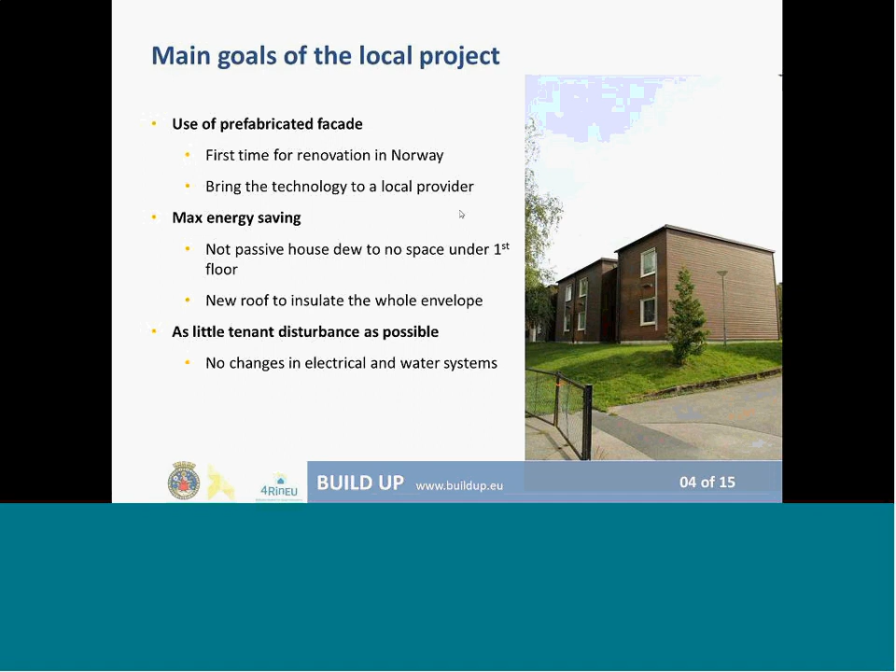We had quite an exciting process of procurement of a manufacturer. We began just a little bit before we started in autumn 2016, and we signed the contract just before Christmas 2017. We were really struggling and almost giving up finding a local Norwegian producer. We almost signed a contract with a Danish one.

It's a market, and we were looking for a manufacturer with a really strategic motivation, because this building is really not a very attractive project. You won't earn that much profit on just building the new construction for this little building. So for some company, the motivation is to come into this market in 5 years or something. And at the same time, we as a municipality have some extra documentation needs and some extra requirements for our companions. So usually not the first choice for the company.

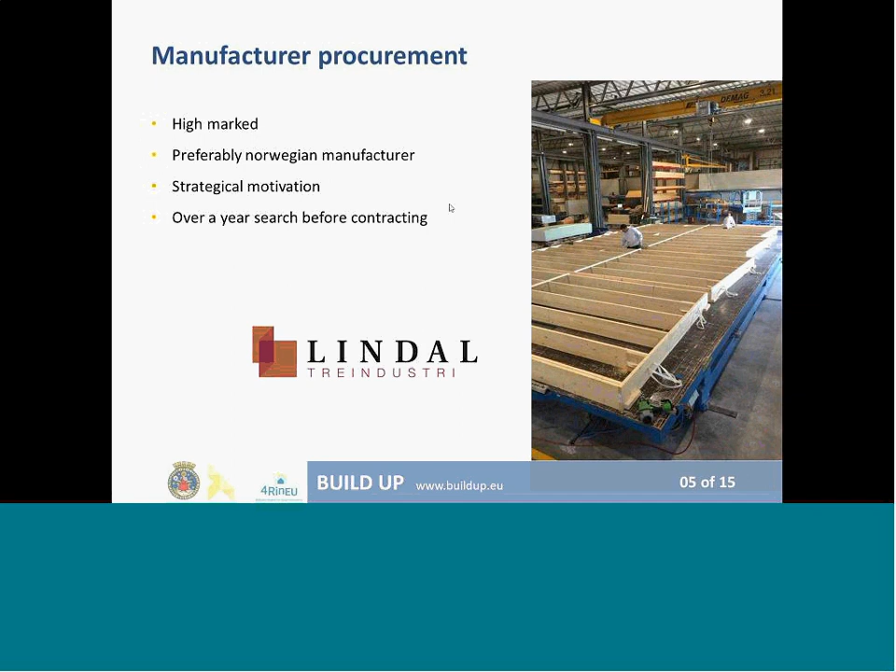But we found, and I think the manufacturer that was chosen at last, Lindal Treindustri, that you see down in the picture, I think they are lucky to be finding us too, because they are continuing further with this kind of construction now. Lindal is placed in South Norway, so it's about 3-4 hours driving from Oslo and from the construction place. That is not so far and CO2 friendly, at least at some level.

The next step was picking the design team, and there we were doing a really careful job too. We began with a design group leader and chose one person, an architect, a construction engineer, and an energy designer. And we had our own timber element specialist. With a certain type of background, you really have to have the right motive to participate. So at the high point, we were probably like 15 specialists in the design team for the Lindal designers.

At one point, we came to the hard design, and we really had to have the support from Eurac and Gumpp & Maier. With a lot of communication and work to coordinate our targets and our local limitations and our local rules and norms. That I assume is probably normal internationally, but for us it was new, and we really appreciate the support.

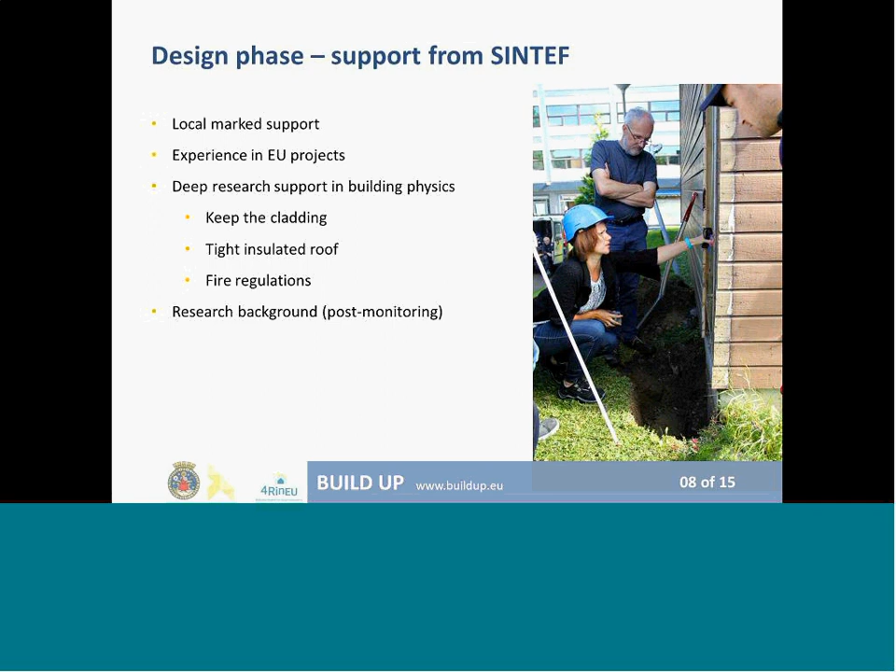We used the early Reno tool later in the design phase, and that helped a lot. And the rest to do some renovation, because we didn't want to disturb the tenants, as I mentioned before, and that made us not change anything about the water consumption system. And we didn't really have any use for the plug-and-play energy hub.

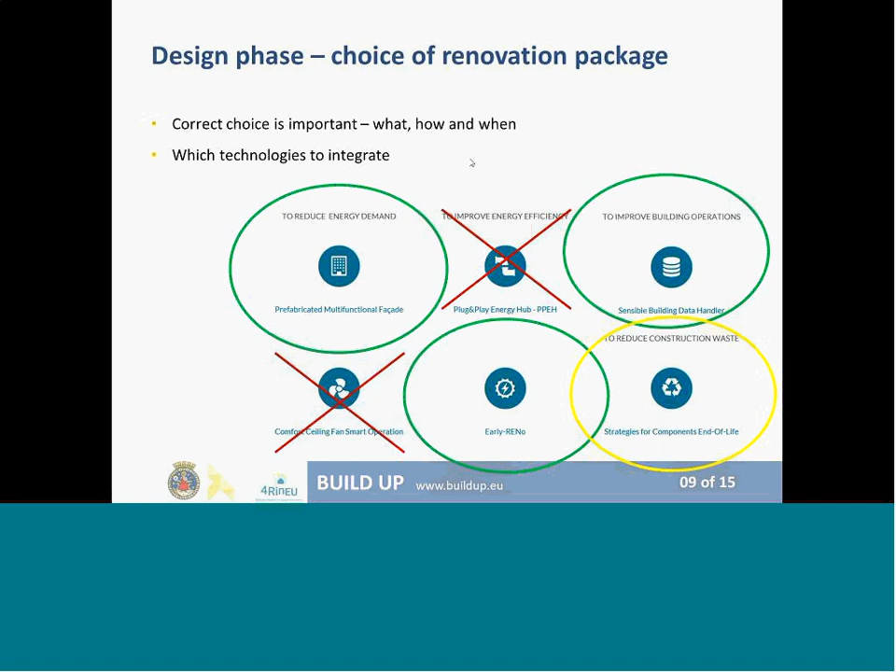We will describe now. We used BIM with scanning of the building, whole design in 3D in the building model, and then we sent this model and collaborated in this model with the production phase. They used this model to make the elements and to do the cutting. So the communication was really crucial between the general construction design and the detailed element design. And very well, the guys were working together basically in the same model.

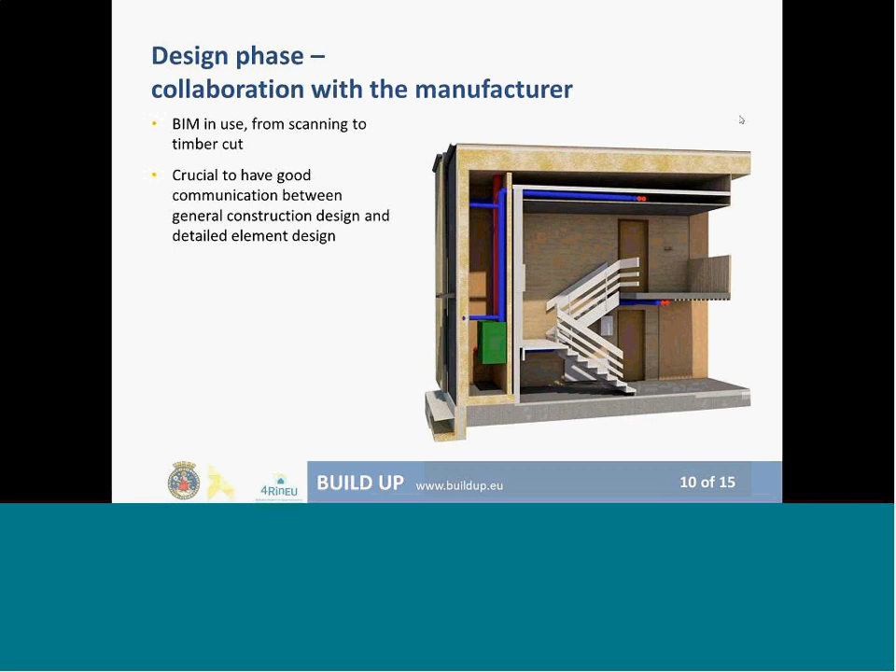And here is the production place. The cutting is automatic. I'm sorry. The production, the building of the elements is mostly by hand. So it helped a lot because we were doing some totally new things, like mounting of the PVs inside the elements was really new for us. So we had to think and build new technical solutions.

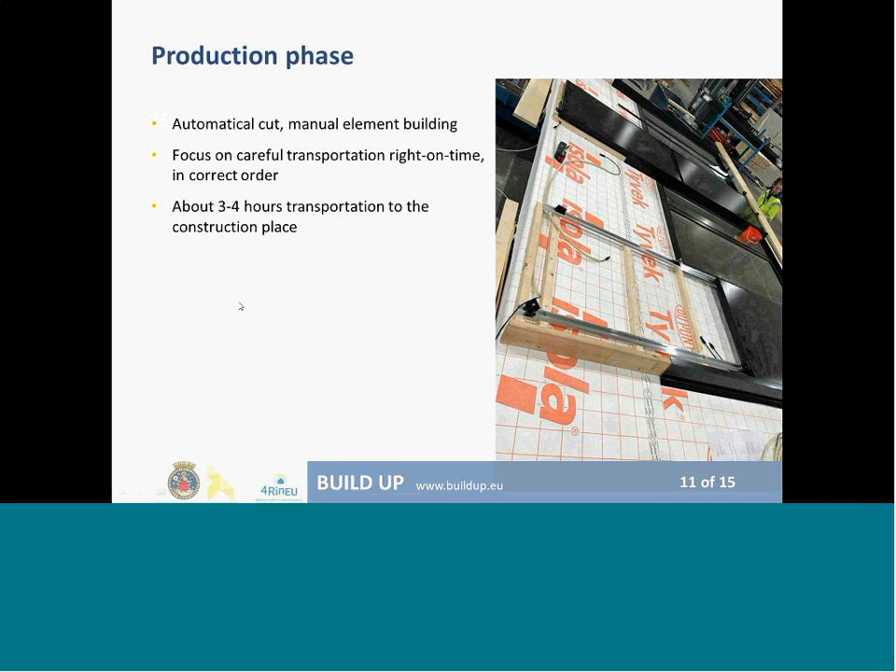It focused on careful transportation right on time because we didn't have place for the elements on the site. So we had to plan a correct order of what we should use in mounting, and then transport it to Oslo in this order at the right time. It is one of our proud moments.

It's this summer, June, where we were mounting the elements, and just as Maximilian described, it went just as perfectly planned. Everything suited to the millimeter, and details were really thought through. Coordination on site was really good.

We had to turn the elements around between the truck and the building facade, and we did it in the air because we didn't have place to put the element and then take it out. But also this went very well. So everything around the elements mounting was really just perfect. I was enjoying watching it.

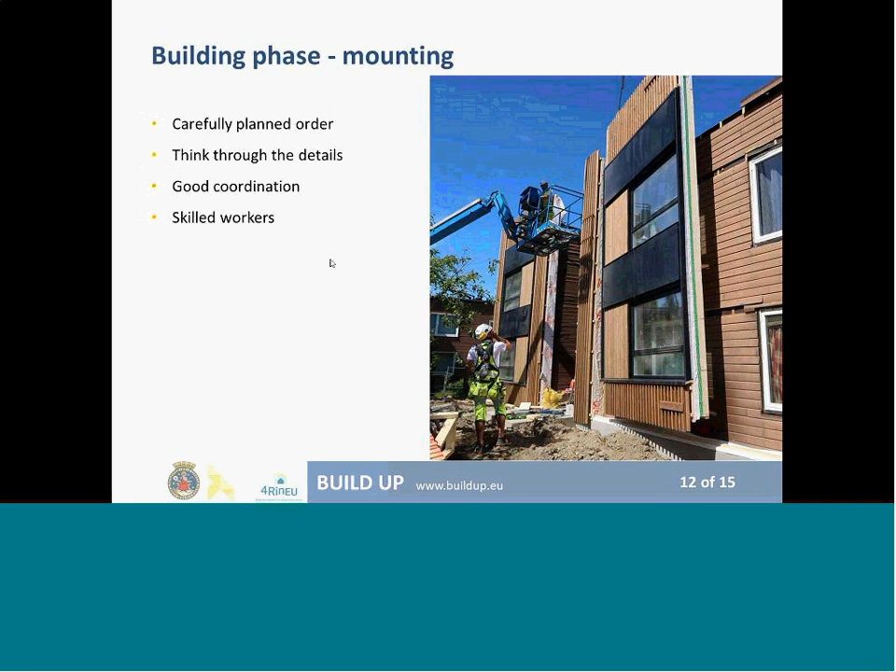You see, we chose to split the elements vertically. So we did the whole of the building. This was also to spare some difficult construction details, and due to the not high building, it was really feasible. One of the main success factors was working with our tenants that were living inside.

I think this is one of the most important focus areas, at least for social housing, because tenants are living inside the apartments, and many of them don't leave in the daytime either, so they are inside while we're working. There is some noise anyway, so they have to understand what we're doing and how it will affect them, who we are and what the plan is and so on.

So we had to do some special resource planning, use some specialists to communicate with tenants, do some information work in advance, and plan communication during the process. We had a really high focus on safety, because while mounting, we had to mount over entrances that were in use. In the end, the tenants were happy with the work. Now the neighboring buildings are asking when we'll come and do something like this.

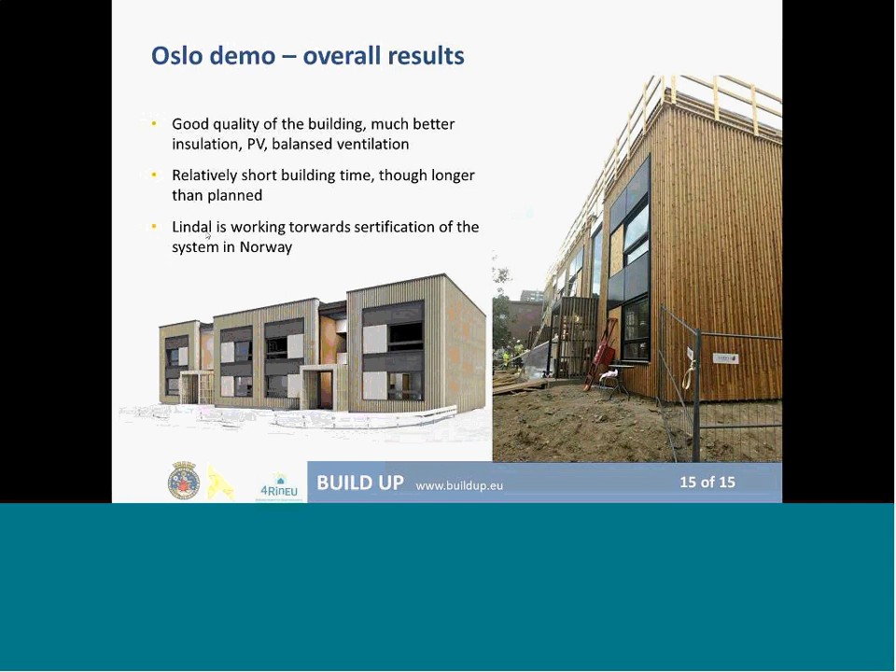I received a question on the chance to do the same without the research project. Thanks to the research project, we covered the extra cost due to the fact that it's the first time you use this kind of approach for renovation. So maybe your opinion on whether this would have been possible without the research project, and if you are going to replicate the same in other buildings. You said that you have 30-40 construction sites a year, so maybe you can redo the same without the support of the research project. What do you think?

I think yes. It should be working with this, and it looks really hopeful that the project is choosing to work further with this kind of solution. Because as a building owner, we usually do not describe which way to achieve our targets. We have the bid and we put some targets, and then we participate in the design process. It's rare that we would say to use the prefabricated facade in this building. We would address it as: we have to save 60% of energy. Then it's up to the design team, the producer and the subcontractor which way they solve it. That's the normal way of doing the work.